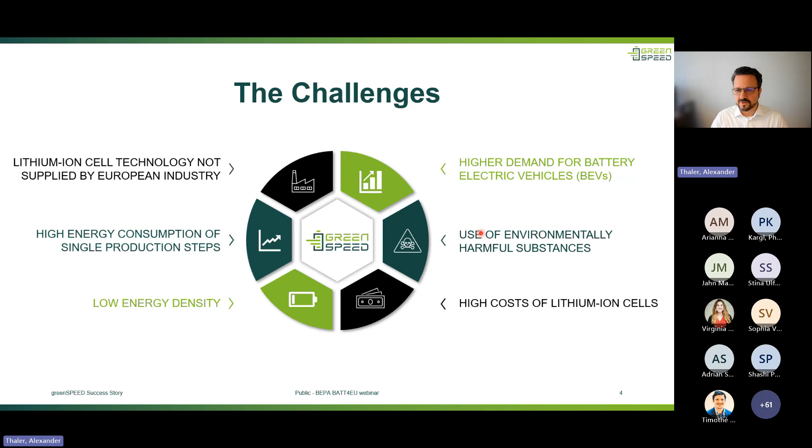So now for today, I would like to focus on the topic of what processes can be used and applied to get down the energy consumption of single process production steps, and on the other side, reduce the environmentally harmful substances involved.

We have a very innovative partner in our consortium, which is LeydenJar. You probably already know about their pure silicon anode, which we also try to utilize, and we did that. And on the German side, BMW as a lead for the final product, the EV, Forschungszentrum Jülich, dealing with anode topics.

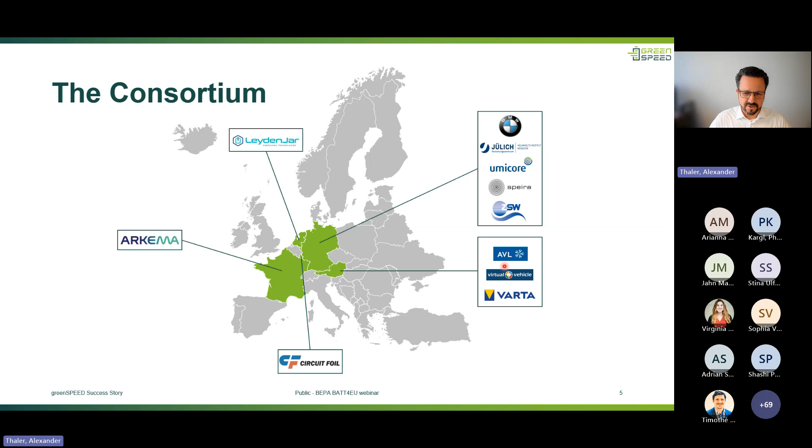Pre-lithiation. Umicore is a partner for active materials on the cathode side. Speira is another partner, dealing with the current collectors. ZSW on the cathode side, and there is the Austrian part of it, AVL system integration, Varta cell integration, and us somewhere in the middle, doing some support activities on the virtual upscaling and integration of the technology.

Now, what is done as a big overview? I tried to just depict the process chain of how a cell is getting manufactured, and on the very top left, you have the things we do on the cathode side.

So it is the focus on a nickel-rich cathode that is going for a solvent-free process. We do on both sides, anode and cathode, optimize the current collectors, and we have also a task dealing with AI and getting an idea how these processes can be optimized faster than just trying. So there was also some interesting results on that.

On the lower end, you see the anode part. There is one branch dealing with close to market materials, that means a mix of graphite and silicon to a high extent, bigger than 60%. And we have, as already mentioned, LeydenJar with the pure silicon anode. That is dry processed, very new, very innovative technology.

On the anode side, further pre-lithiation, and now I just get rid of the rest, what we don't want to talk today, because it would just not fit into the 15 minutes. That is what we will have on the cathode side, the anode side, and of course the outlook at the end towards the project results.

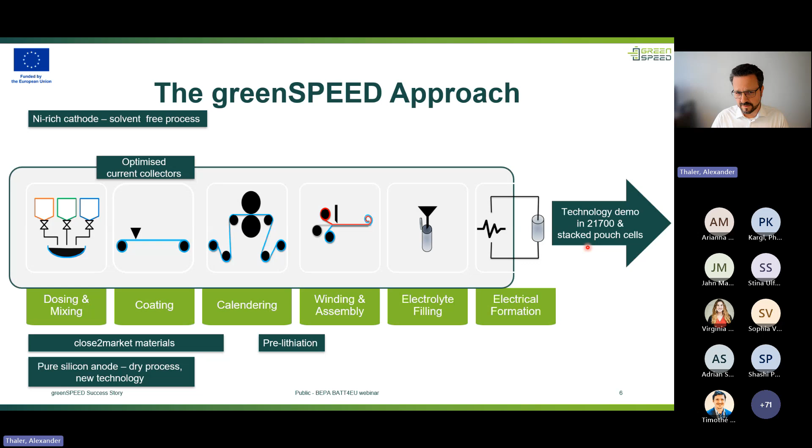The project is in its final stage, so it will end this year. So there are some results pending, but we are quite in a good shape when it comes to demonstrating our results. So first step towards anode.

You see here 3 main tasks. One is the anode formulation, and again you see the two branches on the anode side, which is the silicon graphite composite produced from a wet process, and we have the innovative part, pure silicon with this LeydenJar process. And you see here the partners who are contributing to that.

Of course, there's always Arkema with the binder topics within, and BMW supervising the process. And Varta really wants to understand, they are doing actually the silicon graphite content, and of course are very interested in understanding how this then can be further integrated into the full cell.

As mentioned before, the anode substrate, the copper foil is one part of it, because when you think about putting pure silicon on a current collector, you know that there will be a lot of mechanical stress. Circuit foil was having a nice solution on that.

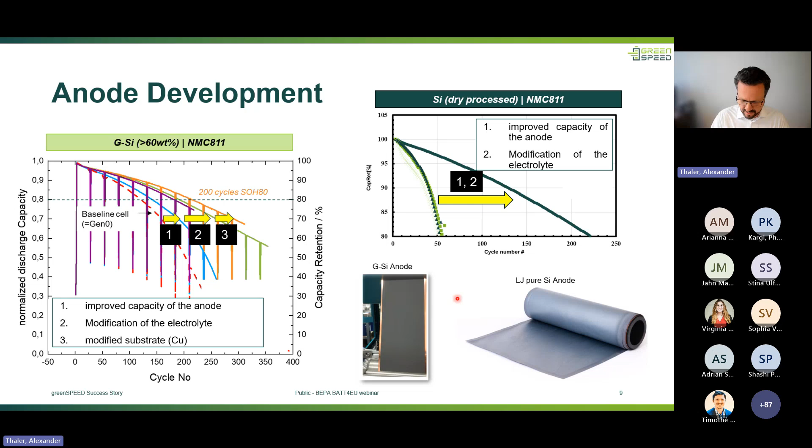So that's a little bit the thing also we have within the consortium, that we try to really go for the machines that allow for later upscaling. A special topic for the pre-lithiation, also that was done on the Jülich production line, or Jülich pre-lithiation line, on the roll-to-roll basis.

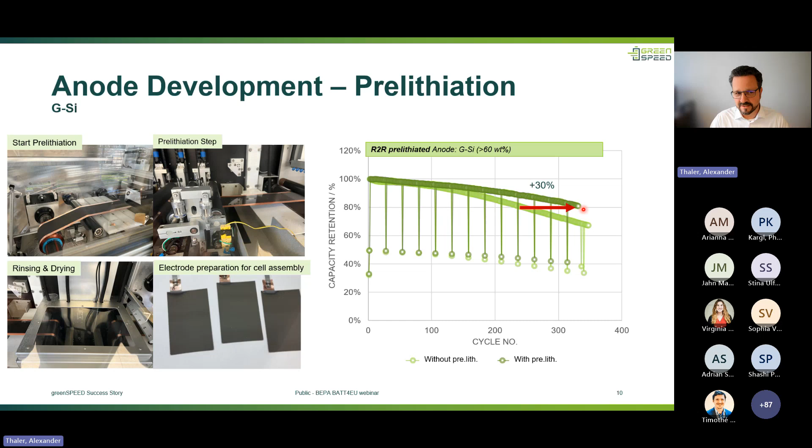And you can see on the right side, without and with pre-lithiation, an increase of 30% of the cycle life. So the excess lithium is there, and it's showing its result in the final cell.

On the pure silicon, there were some investigations done when it comes to degree of pre-lithiation. You see here the reference in red, one pre-lithiation step with 5% in green, and 10% in blue. You see the different behavior on the area capacity towards the final cell, and on the other side, the Coulombic efficiency, how that behaves differently through that development.

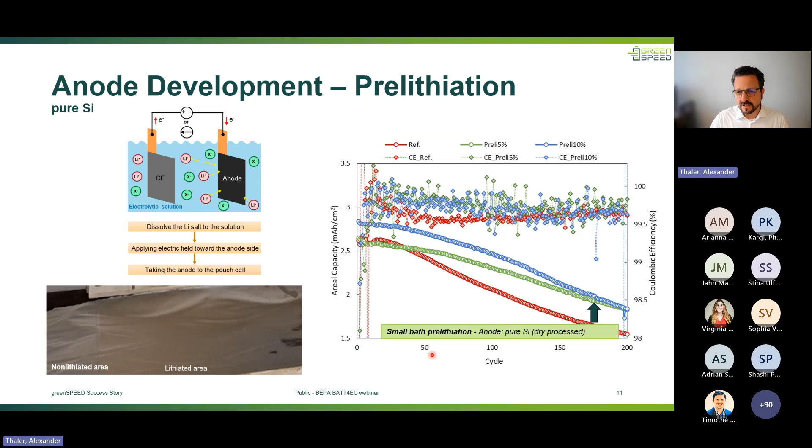What might be important to say is that the pure silicon anode was not processed on the roll-to-roll. It was actually done with a bath pre-lithiation, but the results are obvious that these things are important to investigate towards the pre-lithiation degree.

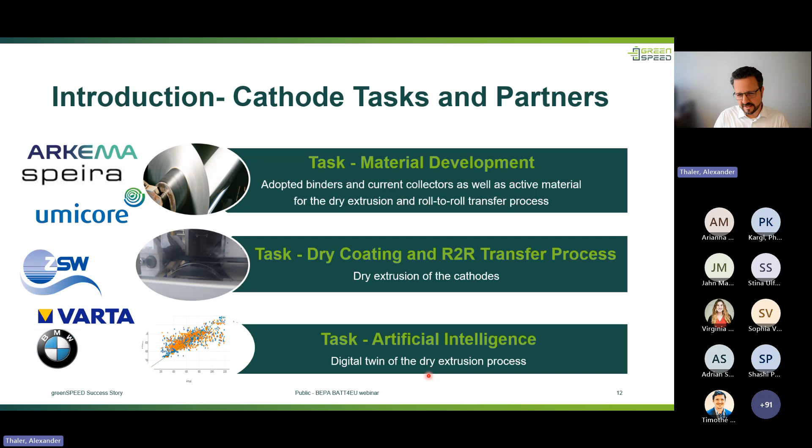Okay, cathode part. Of course, material development needs to be done. Binders, current collectors - Arkema, Speira, and Umicore are partnering here. Then ZSW do the dry coating, and some part is done here with artificial intelligence to optimize and get an idea where this process can be optimized in a simple way.

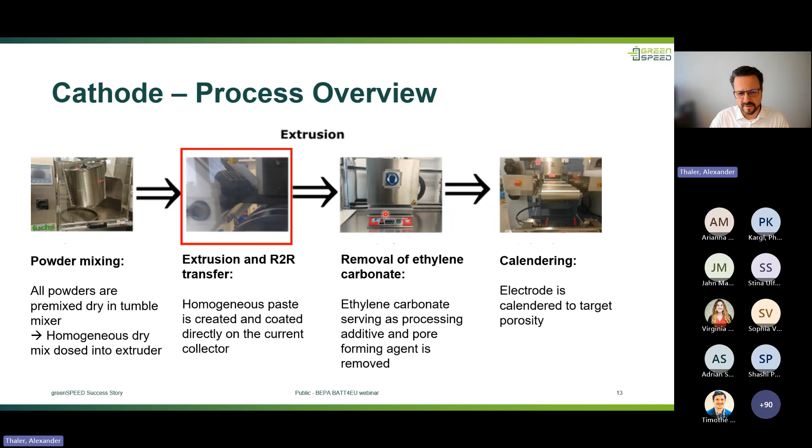Dry processing, a very brief overview on the left. The dry powder is mixed, hopefully homogeneously mixed. Then it's transferred to the extrusion and roll-to-roll transfer. We have ethylene carbonate in as a processing additive that needs to be removed after the extrusion process, and then calendering is done.

If you want to look in more detail towards the structure of this process, you have here this chamber where you put in the dry active material. Then this goes to the extruder. Throughout that extruder, this active mass is formed, and then it goes through the slot die and is transferred onto the current collector.

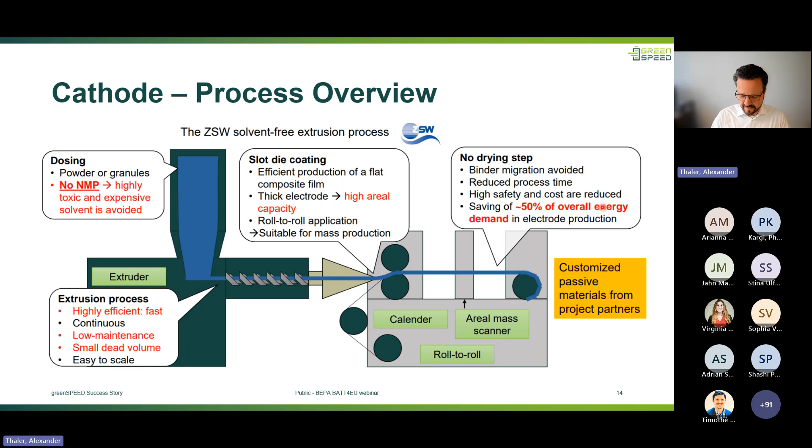That brings down the energy demand because the process steps are very much condensed to what is really needed.

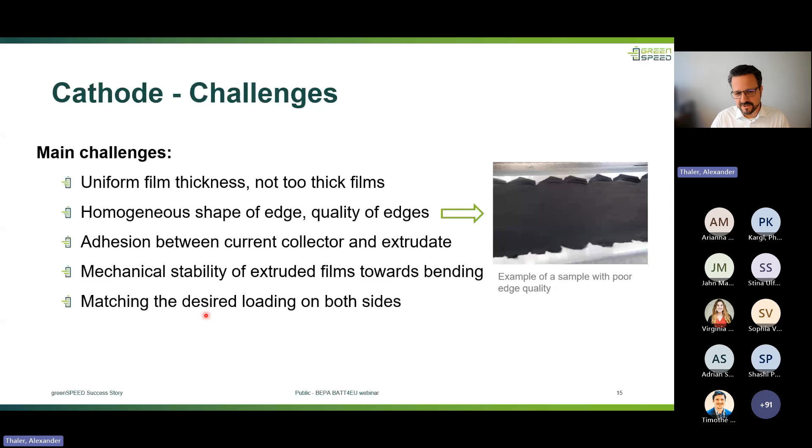So what were the main challenges? Hopefully that picture you see on the right is not the final one. Searching for uniform films - the shape of the edges is a critical thing. The adhesion until now is a big challenge, and of course mechanical stability towards bending of the foils is a thing. Due to the fact that this process is one-sided coating on the current collector, it's a challenge to match the desired loading for both sides.

So all the process steps were optimized. We have some electrochemical performance, and there is also a stable process now enabled with double-side coating. And the digital twin showed also some reasonable results to optimize the process itself.

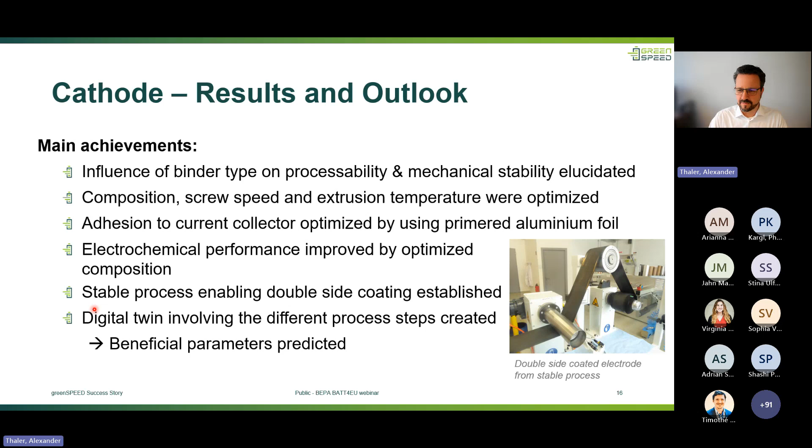To the cell - electrolyte, when it comes to lifetime, is a very important topic. We have Arkema here as one of the key partners. These electrolytes are optimized towards different anodes and looking at the cathode. Then the big thing of Varta is the cell integration into one pouch cell and the 21700 cell format. Of course, there is testing and validation due to the fact that we have set up quite neat requirements. We try to fit to them.

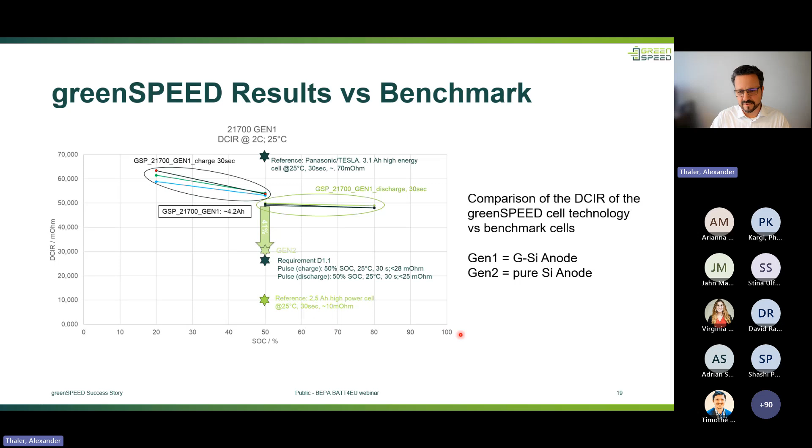Finalizing the results, you see a huge drop in internal resistance when it comes to the pure silicon anode. It seems that with this technology, we might meet the DCIR requirements, at least to some extent. You see the references we set for ourselves on the high energy side, on the high power side, and a little bit as a result spreading over the state of charge of the single cell.

Summary of the project demo: we have tried hard to get all these innovative processes demonstrated in a full cell. So that is the high silicon content anodes, both in stacked pouch cell or 21700 cell, and the dry process cathode is also demonstrated in pouch cells.

So the NMP is not there in our process anymore. We gathered a lot of data regarding the process chain, especially when it comes to energy and cost, and of course the interfaces between the partners and the processes. The energy demand and the cost are assessed, and we have modeling activities supporting this.

We learned a lot about interfaces when it comes to shipping this kind of precious parts between the partners. It might be one of our challenges in Europe that we spread our work between different partners, and that also brings up the necessity to take care of these interfaces.

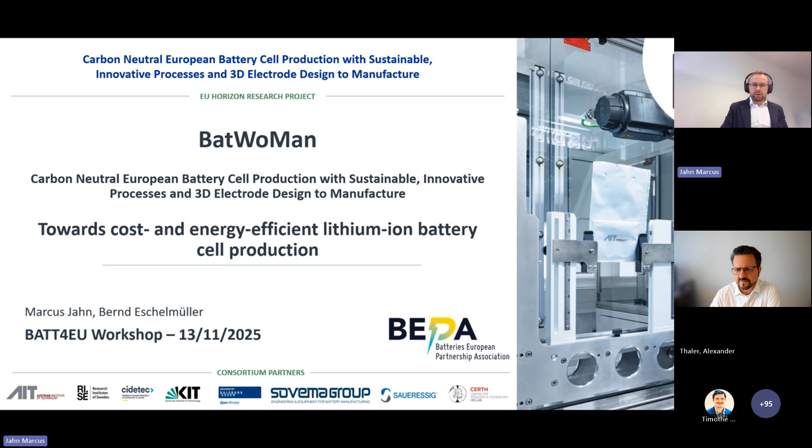To introduce you a little bit to the consortium, I already talked about us, which is AIT, so we were the coordinator in this case. Then together with us was CERTH, who's based in Greece, the Sovema group in Italy, CIDETEC in Spain. We got RISE from Sweden, and we got Saueressig, University of Duisburg, and KIT from Germany.

So once again, I think it's quite clear why we are working on the topic of going for reduced energy consumption and sustainable and cost-efficient cell production. Just to highlight this more, there are several graphs on this, but just to give you an idea of the energy consumption share for the battery manufacturing process, the three main contributors are the formation process, the coating and drying, and the dry room itself.

So those were also the three areas that we loosely tried to focus on the most for this particular project. And the idea was really to go into a project that would benefit the actual battery manufacturer and the OEMs, which is also why we didn't go too much into the materials itself.

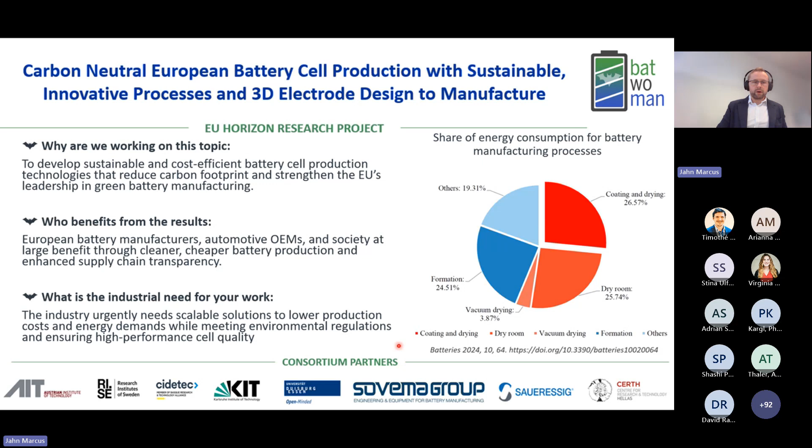So there's no large material innovation per se, other than the actual processing of those materials. In fact, we opted for the most part for an NMC 622 and usually used just some standard graphite. So the idea was always to try and go for lower production costs and energy demand in all of our experiments.

Generally speaking, already introduced the idea of sustainable manufacturing. We don't have to go into all of this, but basically it's a combination of different things, from reducing inactive materials, over energy efficient processes, all the way to going for raw material selection and longevity of the cells, including the second life part.

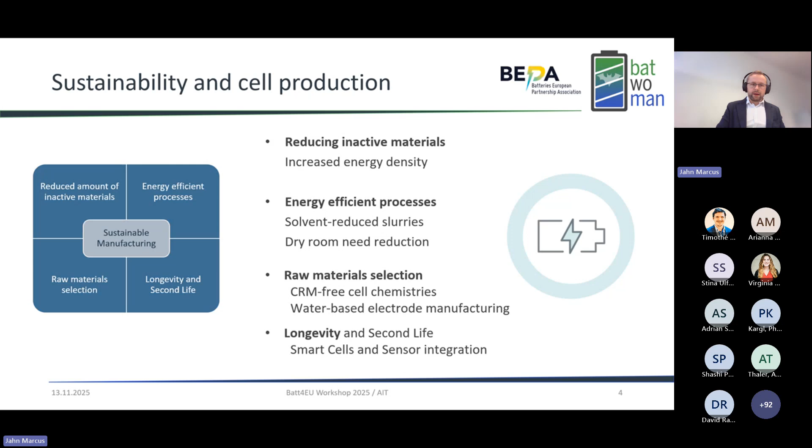So we obviously couldn't cover all of this, but we looked at some of the potential energy and cost savings from the production processes that we can see. You can see some numbers here that are possible according to the literature that is out there, and compared a couple of conventional production processes, basically from the slurry preparation all the way to the formation and aging and reduction of scrap rate, and looking at some more novel concepts of how to mitigate some of these challenges.

So in this project, or at least the things I'm showing now, we looked at the NMP-based slurry preparation, basically reducing that for water. Now, even though we don't have an awful lot of energy reduction here, I think there's a cost-saving potential here, and of course we're also looking after the sustainability of this process.

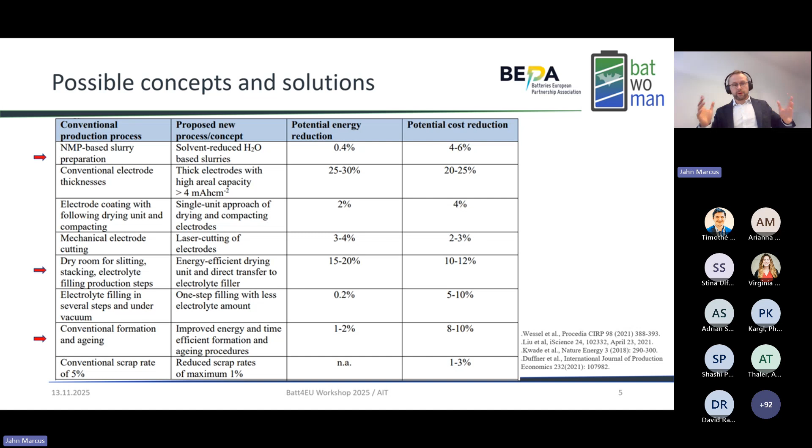Then we went basically for reducing the need for the dry room when it comes to things like slitting or stacking, electrolyte filling, and so on. Everything that usually happens there, trying to reduce the steps required within the dry room, therefore the time it takes for the cell to be in the dry room, or maybe even the size of the dry room. And then looking at the formation and aging itself.

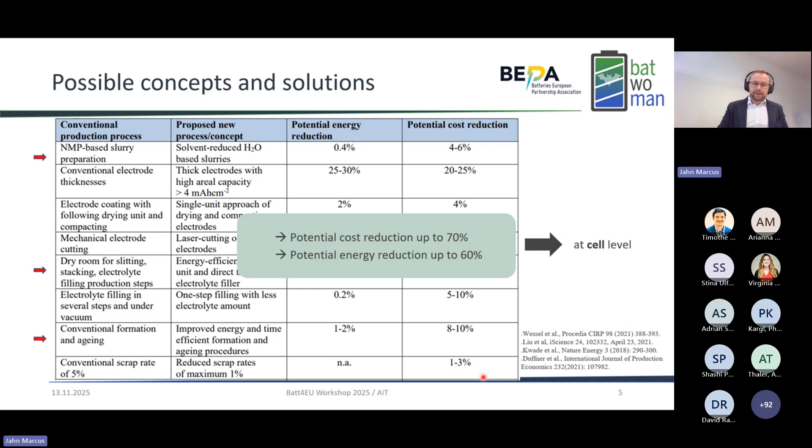So overall, at cell level, if you would achieve all of this—which, spoiler alert, we did not even try within just one project—there are huge potential cost and energy savings at cell level, at the very least, in these few process steps.

Roughly for the project itself, we had 8 work packages, out of which 2 and 3 were more digitally driven, and 4 were more on the technical side, in the sense of actually experimental. In the course of the next few slides, I'd like to highlight some of the most impactful work packages in the project.

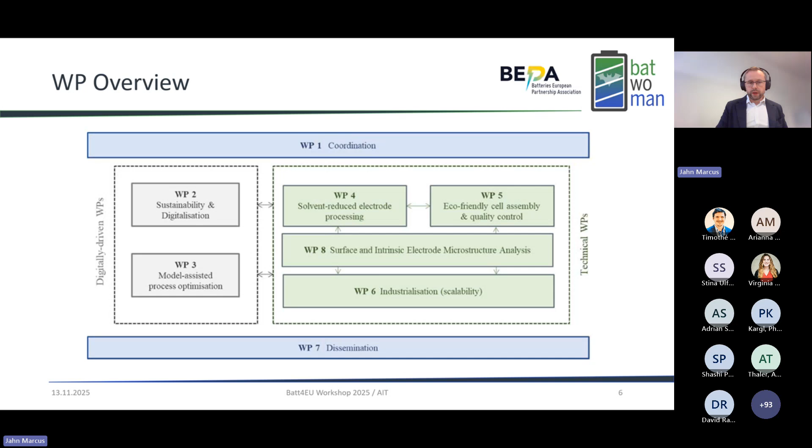First of all, work package 2, sustainability and digitalization. What we tried to do here was go for an improved dry room design, or look at what the improved dry room design could actually do for us.

In the first scenario, we tried to reduce the dry room need just for cell stacking, then drying and electrolyte filling—closer to the conventional process. The final scenario was to reduce the dry room condition only for the finished stacked cell and the electrolyte filling itself.

We could see, on a theoretical basis, based on a 39 ampere hour cell which we simulated in this process, that a reduction is possible by almost 3/4 when we go from the state of the art or conventional process to a reduced dry room condition, shown here on the left side.

If we go over to the process where we only have cell drying and filling in one machine, we were able to reduce the actual energy consumption per cell drastically.

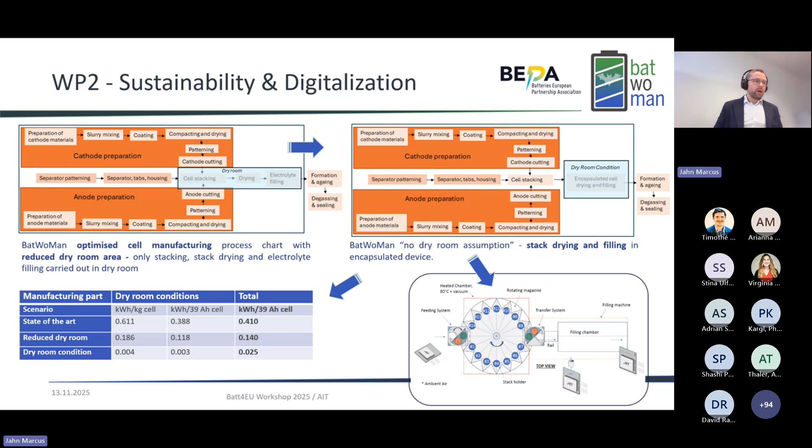We also came up, in preparation for the battery passport that will be quite important soon, with a data space demonstrator. We set up a data space on our web page and tried to comply with what will be needed for the future of the battery passport sector.

I'm not going to go into the details of this model, as that would take up all the time I have today. However, I definitely invite you to get in touch with us, or the project itself, on the web page, and check out what we've done there—maybe we can develop this even further together when data becomes available.

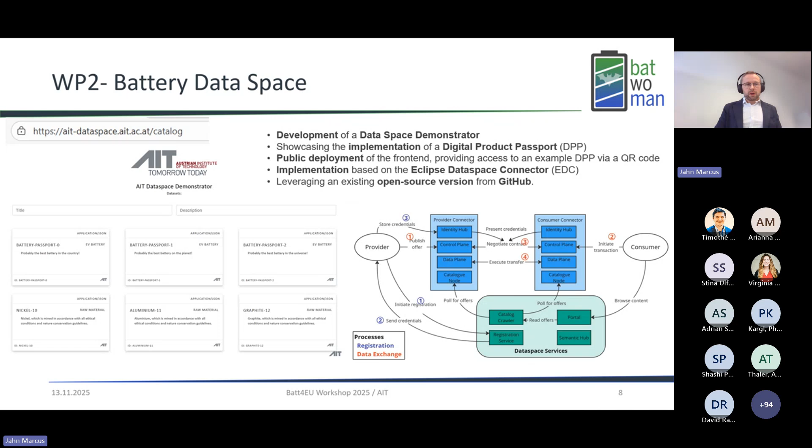Very similar for work package 3, where we looked into model assisted process optimization. We looked into the data generated for some of the most critical process steps—coating, drying, calendering, wetting—and looked at how this correlates to performance.

What we really tried to do is cut down on the experimentation side. You can basically input a couple of parameters relevant for the step, and then get a little bit of predictive performance out of this.

This is something that is publicly available, or will be made publicly available. At the moment, it's hosted on the CIDETEC webpage. Once again, I invite you to get in touch so you can try this for yourself.

I think this is a very nice starter to reduce maybe the trial and error phase with your material. We're not claiming it's perfect, but it's definitely a first step in the right direction when it comes to processing parameters.

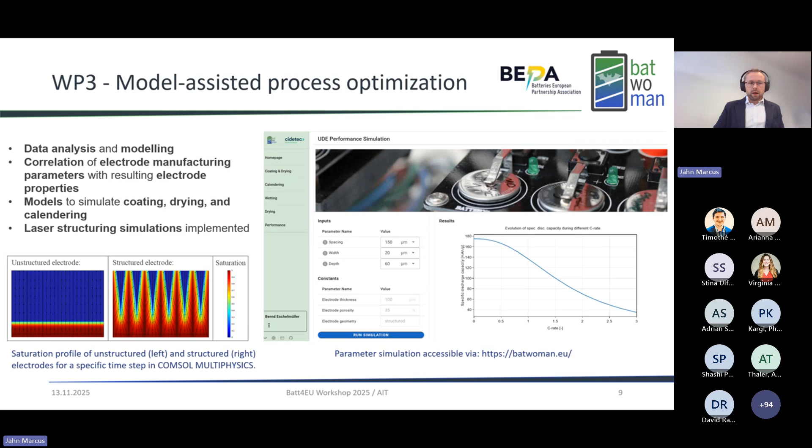Work package 4 is one of the more technical or experimental work packages. Here we tried essentially solvent-reduced electrode manufacturing.

With traditional water-based electrodes, we used an NMC622, as I said before, so we went water-based right from the start. However, when you do that, we only achieved a solid content of 59% in the slurry, which is not particularly high, but as you go to water-based, you tend to have a lower solid content compared to NMP, which is an issue.

By altering the binder system, going from the more traditional CMC-based to a more lignin-based binder, we actually managed to increase the solid content to 73%.

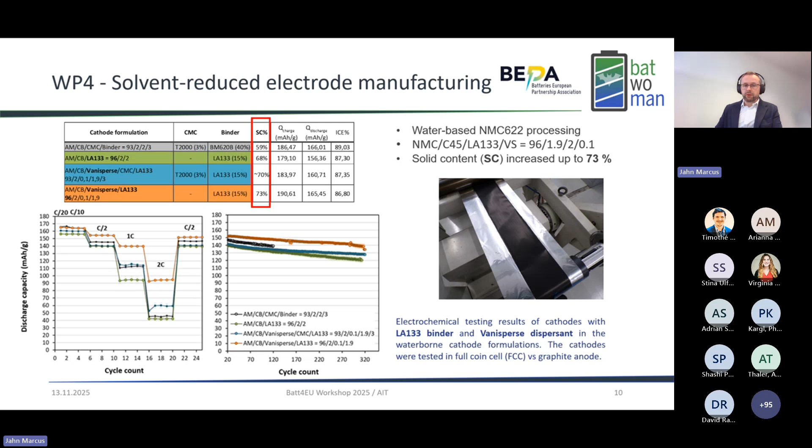In work package 5, we then also tried to go for eco-friendly cell designs and validation. So we went with a 3D electrode design, doing some laser structuring of the cells.

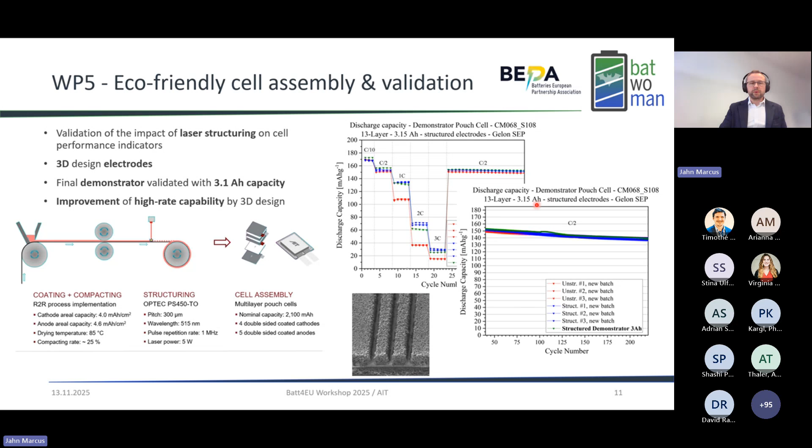Without going into the extreme level of detail, you can see as soon as you go to 1C, 2C, and 3C, the red is the unstructured baseline and the structured different variations. We actually got certainly better performance at higher C levels. At low C level, so C/2, we have very comparable and stable performance, so we don't really lose anything, whilst keeping the mass loss at about 6%, definitely under a critical 10% for the whole cell. This was done at a 13-layer, 3.15 ampere-hour pouch cell.

Furthermore, we actually looked into the formation process. I'm not going to give you all the details we studied, but there is, first of all, a deliverable available from the BatWoMan project, which I'm sure we will make at least parts of public after the final review meeting, which is happening right now. Plus, there's a publication out there which came out of this project, which we're quite proud of as well.

In short, we managed to significantly reduce the formation time while not losing any of the performance, which we then transferred also to work package 6, where we simulated the industrial implementation of all the technology we had here.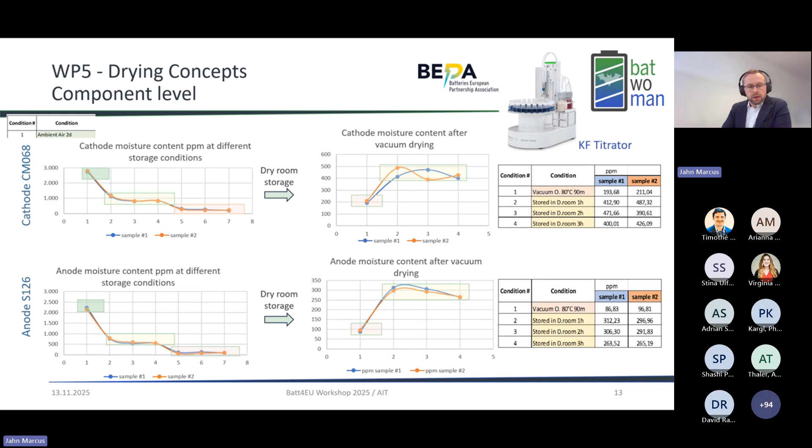Now, when we go to the stack level, which is probably more important, we did the pouch stack for at least 1 amp-hour with these measurements. We also managed to get down in 30 and 60 minutes of vacuum drying at 80 degrees to a very good, or acceptable, moisture level, which translated into good performance, with no measurably inferior performance compared to properly or conventionally dried electrode and cell components.

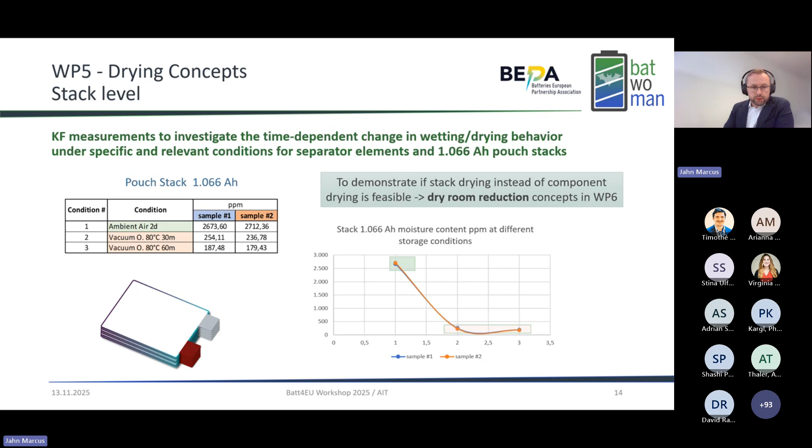So with that, I'll go to the last slide. Essentially, these drying concepts also went into a dry room reduction report. We tried to get this into a simulated production environment, showing that the drying conditions we applied were able to achieve similar or the same performance levels as we would manage with conventionally dried electrodes and cell components.

This led into the concept I introduced initially, where we could assemble the entire cell all the way up to electrolyte filling, and give this finished or semi-finished dry cell into the machine, where you would do the final drying step in this sort of revolver concept, then feed that into the filling chamber of an electrolyte filling machine to do the final stack. Now, the project itself didn't develop the machine, but together with Sovema, a machine manufacturer, we developed the concept for it and got confirmation that this is definitely a feasible concept to work on at an industrial level.

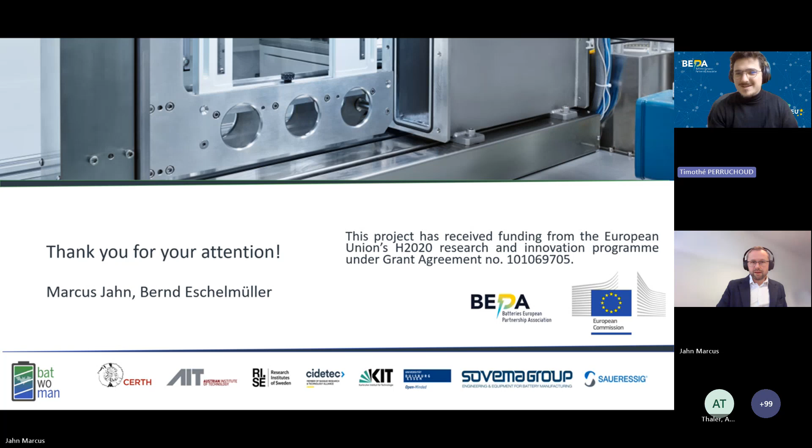Thank you so much for that presentation, great to see what Batwoman has achieved in the past years. There was one question in the Q&A from Yasmin, asking whether there is a plan to prove the cyclability of the aqueous process cells over more cycles, like 1500 plus.

Well, yes and no. No, in the sense of the final project deliverable, because we ran out of time. However, yes, because the cells are still running. We're actually looking at that at the moment to see how far we can take them before they lose significantly in capacity. And certainly beyond the project, I think we will keep working on the concepts developed here.

There were quite a lot of different approaches to work on, which I think is great, because then you see the full picture. But at the same time, you can't go into just one of the aspects in like a 3-year project kind of detail. So we will continue to work on that and look into that.

I would say that this was actually a great example of not trying to have the best ever performance possible that a battery cell has ever seen. However, it was trying to be at the industry standards while reducing some of the conventional energy demanding steps. So that was a nice project really to work on.

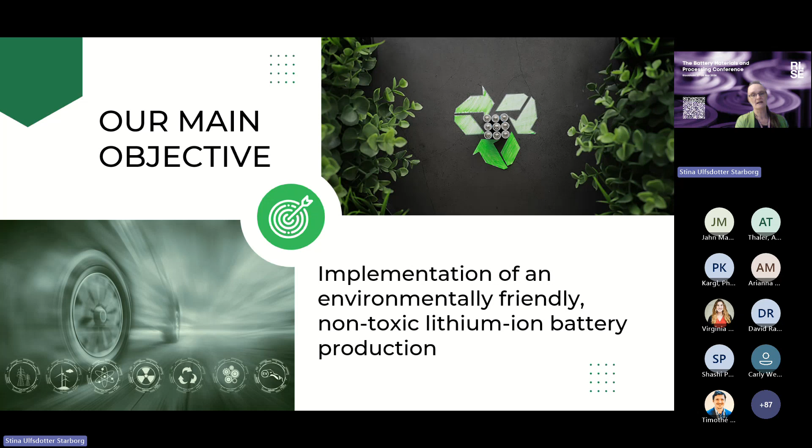Our main objective with this project is to implement environmental friendly and non-toxic manufacturing routes for lithium-ion battery cells, covering both anodes and cathodes.

At the same time, we will have a very clear industrial ambition. We target competitive low-cost cells in both cylindrical and pouch formats, suitable for the fast-growing electromobility market. In short, we want to demonstrate that you don't have to choose between sustainability and performance or cost.

As background information, the project duration is 48 months. It started 1st of September 2022, and it will continue until August next year.

RISE is coordinating, and we have 15 partners from all over Europe. Technische Universität from Braunschweig, Germany; Uppsala University from Sweden; Nanopow, providing materials, from Norway; Talga from Sweden; Kansai Altan from Turkey, providing binders; and Centro Ricerche Fiat from Italy, working on digitalization and specifications.

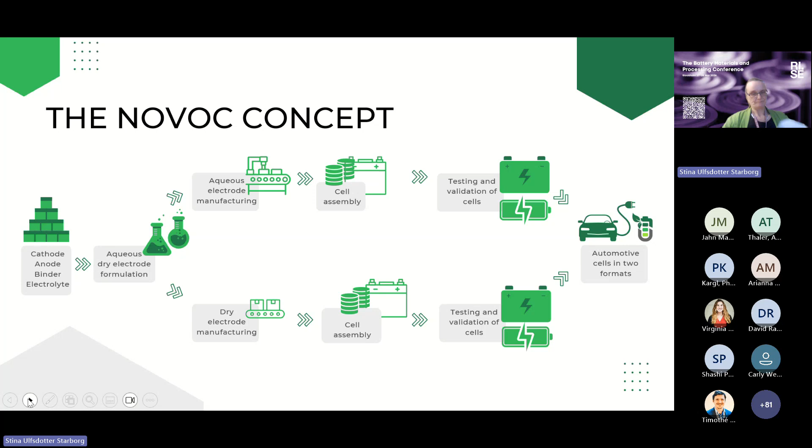If we go to how the NOVOC project worked: we had a work package working on cell requirements and specifications led by CEA as an input.

Then we worked on the active materials, which is NMC 811 and silicon carbon graphite materials on the anode side, and binders from Kansai Altan among others. We worked on optimization at lab scale with AIT's processing of anode and cathode, and RISE processing anode and cathode, and also identified the cell harmonization or cell designs to be used.

Then we made electrodes at pilot scale and are doing upscaling. In the project, we are now in the phase where we are working hard on the upscaling phase, so we have not yet assembled the demonstrator cells, but smaller cell variants. The testing will be performed during spring.

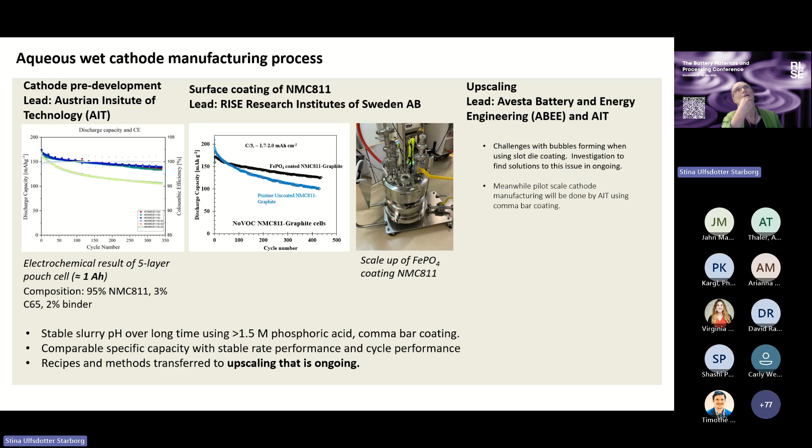ABEE and AIT are working on upscaling, where they have some challenges with bubbles forming, especially when using slot die coating, and they are working on solving this. Meanwhile, they will do pilot scale cathodes at AIT using comma bar coating instead.

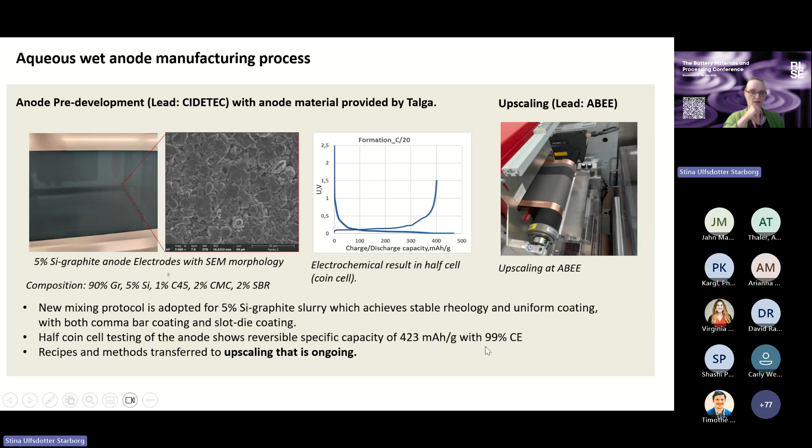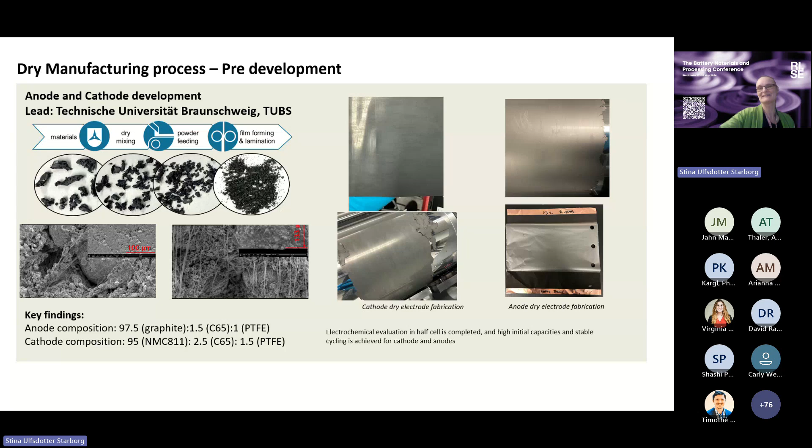Now this is transferred to upscaling, where they have some challenges also. But they are working on this at the moment, and they are confident that they will solve it.

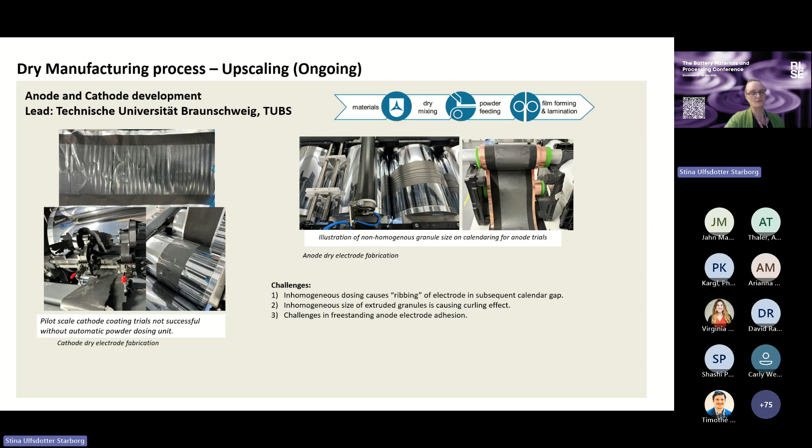One of the key issues is inhomogeneous dosing of the dry granules, which can lead to ribbing effects in the calendar gap and non-uniform electrode thicknesses. They also observe curling of freestanding electrodes and some adhesion problems, and they need a powder dosing system, which is essential. But these learnings are very valuable for future industrial dry electrode lines, highlighting which equipment, processes, and controls are critical. So it's a very steep learning curve.

To summarize, we are now between stage 2 and stage 3 in the project, so we don't have results yet to show for the final cells. The cells will be produced this autumn and early next year, and then we will do the testing.

And recycling work is ongoing, where we use electrode materials, meanwhile they wait on the cells.